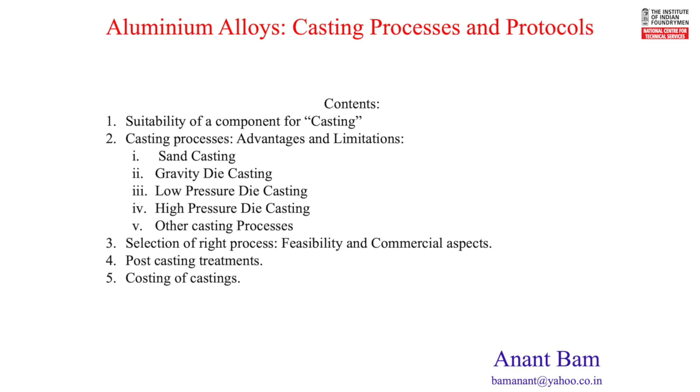During solidification, the grains of every casting are formed. All physical and mechanical properties are directly proportional to the fineness of grains. Too early solidification leads to chilling, and delayed solidification leads to a mushy structure. Both these cases are not desirable. This means we should have more or less uniform solidification, or more or less uniform cross-section of the casting.

Thickness adequacy and fluidity: the liquid metal, as it advances in the mold cavity, starts losing heat to the mold walls and to the air within. This heat loss makes the viscosity of the metal rise progressively. The metal becomes sluggish and eventually stops moving. Since this is an inherent property, it forms a limitation on the casting wall thickness and span, or the length of the run, how long the metal can flow.

Surface tension: since the cavity of the mold is filled by a liquid, every fluid has its own surface tension, which naturally prevents it from adhering to the adjacent surface. So any fine details, lettering, or aesthetic features are subject to the surface tension of the metal. Hence, as surface tension increases, we cannot get a good piece.

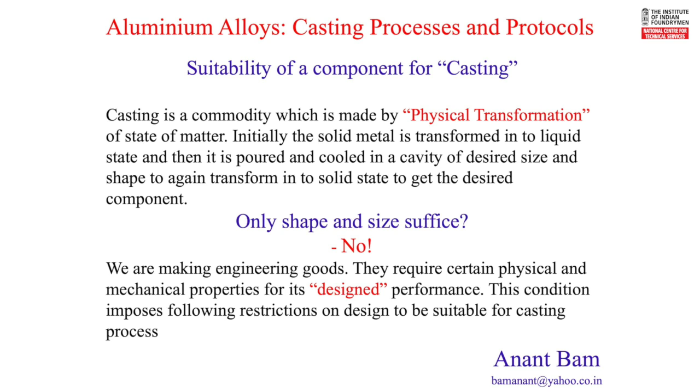Drafts and undercuts: as we have to draw the pattern out from the mold, or draw the casting out from the die, it naturally has to have a draft angle so it can be released. Therefore, we cannot have a right angle or an acute angle to the casting wall. Negative draft causes a dovetail effect and the casting gets stuck in the die. Hence, any such negative draft or acute angle leads to a loose piece. Every loose piece or undercut leads to a parting line, which affects the aesthetic of the component.

Contraction, cracking, and wall thickness: casting contracts during solidification, which creates stresses on its wall. The wall should be sufficiently thick to accommodate these stresses in the semi-solid or just-about-solid condition. Alternatively, we may use highly collapsible hollow cores for larger interiors, which may give poorer surface finish.

Many times there are ribs or walls that need to be joined to the main body of the casting. Too many junctions at a single point or line create metal inadequacy, leading to shrinkage at that portion. Every rib or web or wall acts as a radiator fin, and heat is lost from it through pin-fin theory, such heat loss leading to liquid requirement due to contraction at the center or junction. If the junction is too thin, it fails to feed the liquid, resulting in shrinkage at the root of such fin.

Instead of having multiple junctions at a single point, if one can defer the junction by adequate margin, then naturally such liquid inadequacy can be distributed at multiple places, and hence we can get rid of this shrinkage problem.

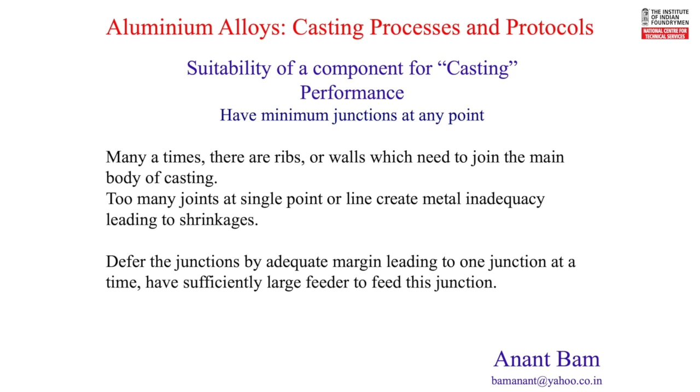Contraction strain: components like spoke flywheels are prone to such strains. These strains are developed during contraction and act on the junction of the hub to spoke and rim to spoke, leading to cracks at that junction.

It can be reduced by odd number of spokes. What happens during odd number of spokes? Two strain components are not added in a single line. They are deferred by a certain angle, and hence the spoke itself leads to a buckling or bend, which is less hazardous than such contraction strain.

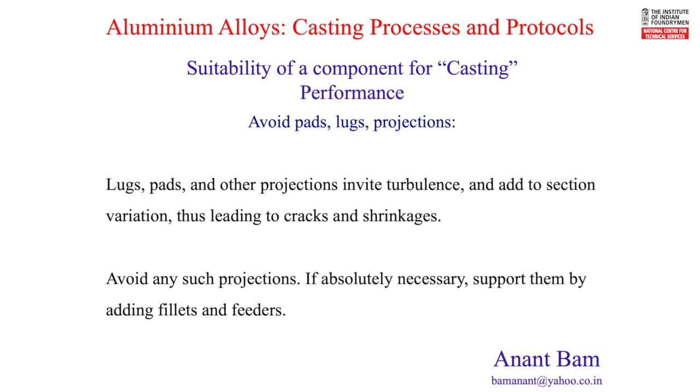Further, such a process can be encouraged by having curved spokes, and such an arc allows more strain to accumulate in it.

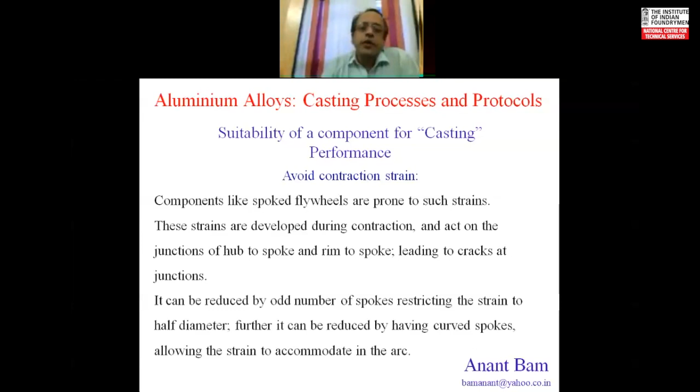Lugs, pads, or other projections invite turbulence during filling. Also, the section variation at such portions is very high, leading to cracks and shrinkages.

It's better to avoid any such section variation, if it is required by design, but then we have to go for selective cooling of such pads so as to achieve uniform solidification. It can be further assisted by providing proper fillets.

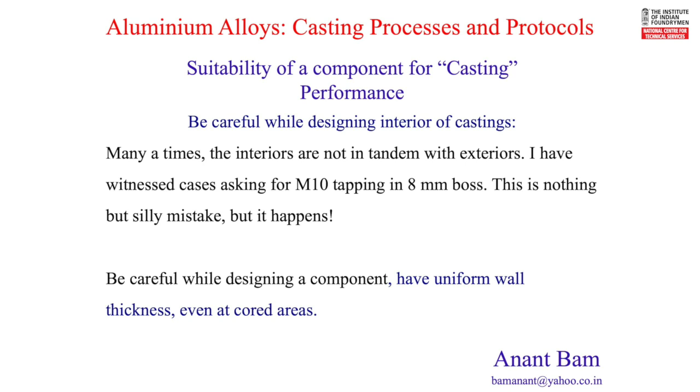Now, this is a silly slide, you may say, but I have witnessed many such designs and drawings wherein the designer has got certain thing in his mind, but the drawing reflects something else. In a tapping boss or clamping hole boss, if tapping is required for M10, the boss diameter itself is 8mm, and we cannot have such a large hole drilled in such a boss. It's a silly mistake, but it happens. So such design mistakes have to be avoided, and one has to ensure sufficient wall thickness even after machining.

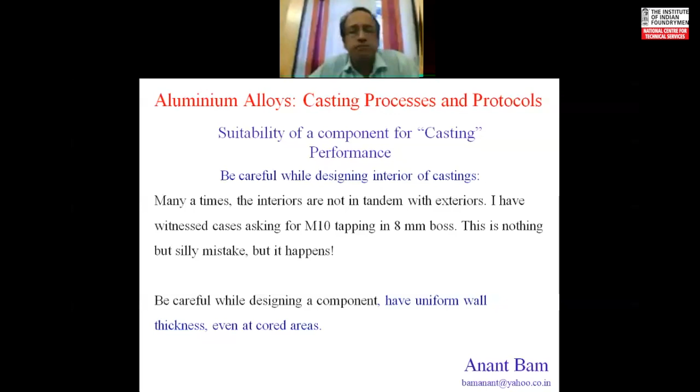Too small cores can be avoided. As a thumb rule, anything smaller than half an inch can be avoided very easily in case of aluminum castings.

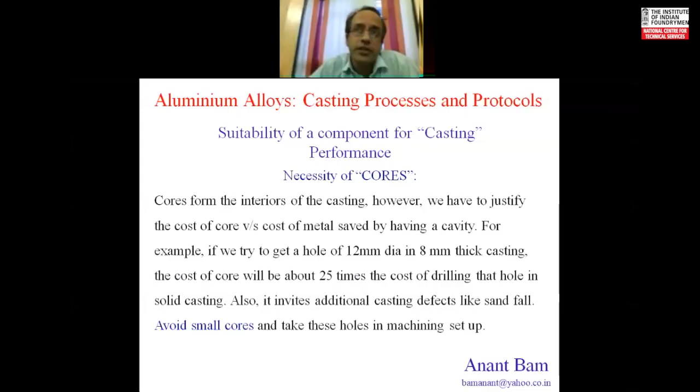When we talk of permanent mold or die casting, then we can go as small as 4mm or 5mm cores using metallic pins or metallic inserts. But anything smaller than that for aluminum has to be avoided.

Too much machining allowance has to be avoided because any swollen casting adds to the mass, and nowadays parties are asking for per piece basis. Lighter the casting, more is the benefit to the foundries.

Also, metallurgically, the skin of casting is the earliest solidified portion, and hence it has got the best metallurgical and mechanical properties, and we are removing that by machining. We should go for the smallest or minimum possible machining allowance.

Practically for HPDC castings, 0.5mm on tool point is good enough. 1mm for medium size castings, gravity die casted. And 3mm on tool point is sufficient for very large castings, more than a meter or so, through the sand casting route.

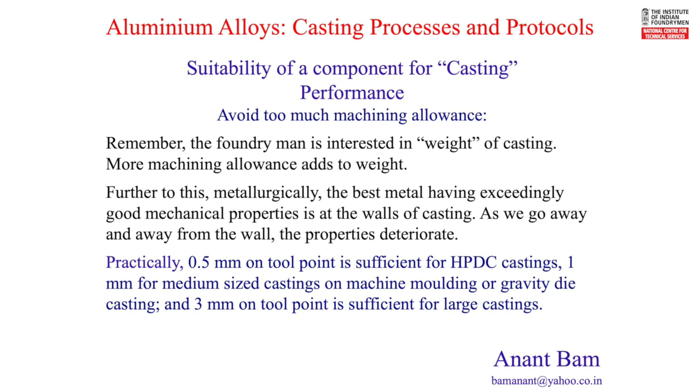Instead of having a simple right angle bend, we can have a multi-axial single bend, thereby reducing chances of any further hindered contraction. Such logic works very well for tubes and pipes.

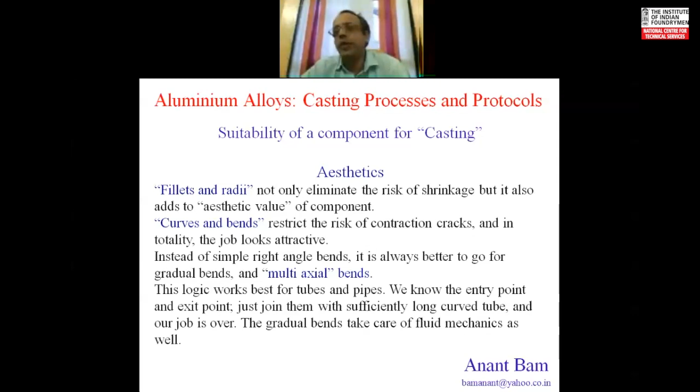Usually, aluminum components are used in engines or intake manifolds or air pipes or anything like that, and thereby you have to connect one end to the other end. Both ends are fixed geometrically. So the best way is to design something like a rubber hose fitted from one end to the other, and a natural catenary or free fall curve that rubber hose will attain, that one has to follow during the design of the aluminum component. That leads to least possible stresses during casting, easiest metal flow, and casting becomes good.

Aesthetics and surface finish criteria have to be noted earlier to process selection. High pressure molding or die casting leads to a better surface finish. But again, all those processes have got limitations of their own, and one has to understand the process and the quality requirements and mix and match both to deliver a good casting or a good sellable component.

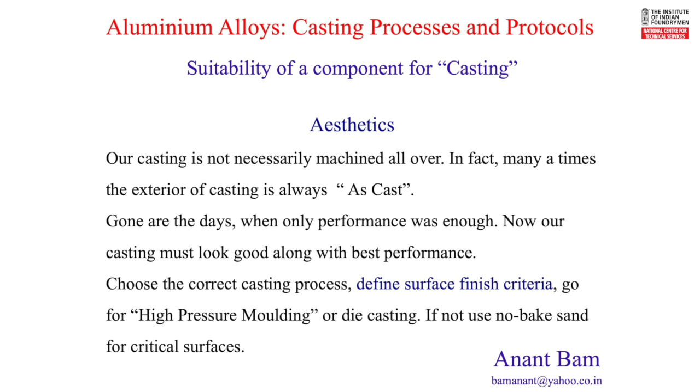Ease of operation for foundrymen as well as machining and assembly shop workers must be considered, because if you are talking of mass production, time study has to be considered. During time study, if you find that fitting some component on a jig, or opening some die, operating some loose piece, placement of core—all these things, which are non-value added items although essential in the process—they do not add to the value of the process. So all these things lead to increase of time, thereby increase of cost.

Have sufficient reference planes, provide clamping pads, use minimum machining, standardized fitments and sizes to limit the tooling, make maximum operations in single clamping, make simple assemblies. All these things are applicable to machining and assembly, but they have to be considered during the design stage itself.

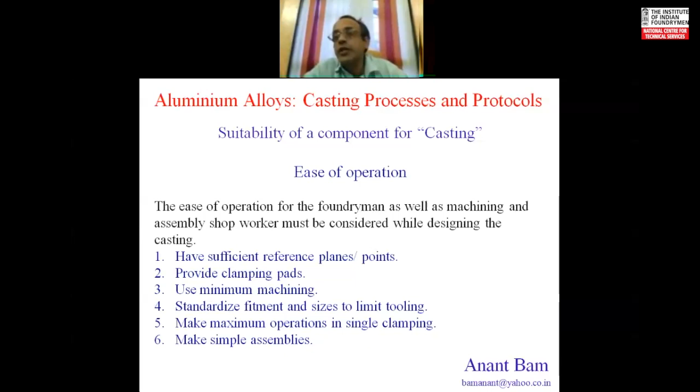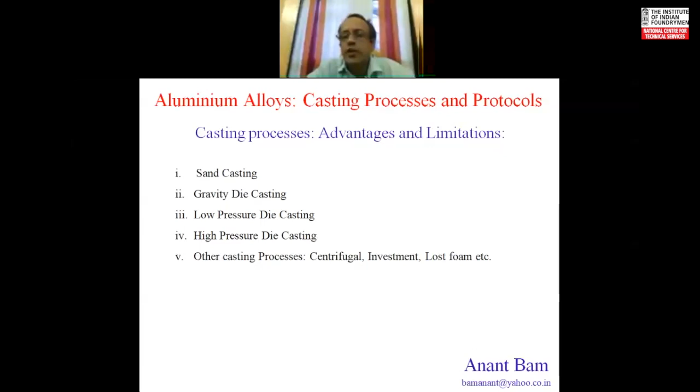Now let us understand the core subject, the various casting processes suitable for aluminum alloys. They can be listed as sand casting, gravity die casting, low pressure die casting, high pressure die casting, and a fifth, broader category of other casting processes, which may include centrifugal casting, investment or lost wax casting, lost foam, or any other casting process.

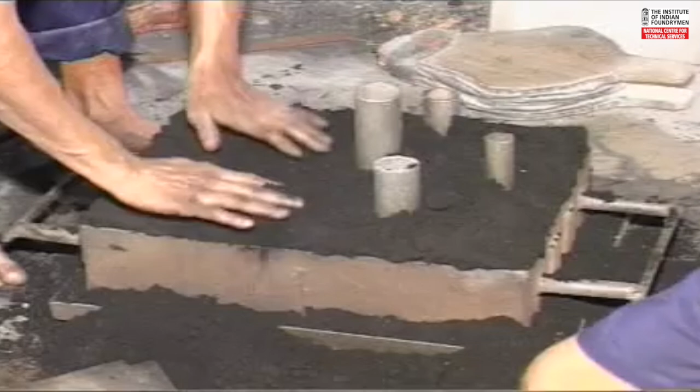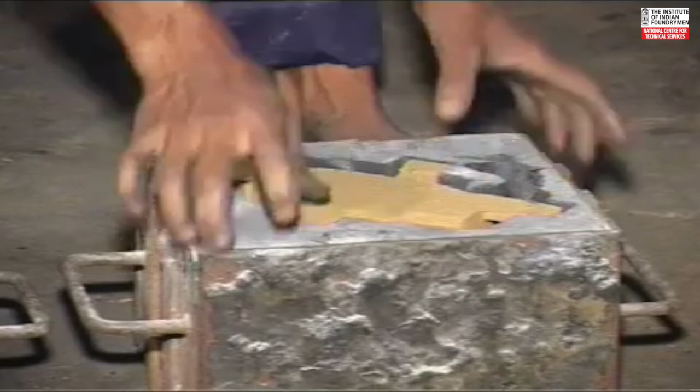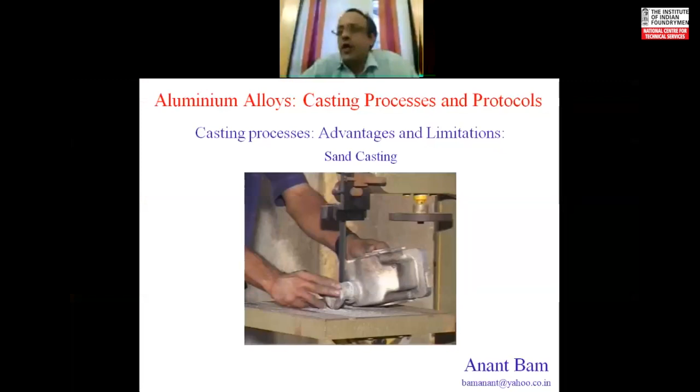Sand casting is a primitive form involving loose pattern hand molding. You may find this in Aligarh, Moradabad, and certain pockets making handicrafts, all jobbing foundries. Even in Chakan, Aurangabad, and Pune, these areas still follow this primitive practice. There are only one or two foundries in India which have machine molding for aluminum castings. This is because aluminum is very friendly to permanent mold casting, i.e. die casting. Hence, only prototypes or small batches remain with sand casting, and sand casting is not popularly used in any automated molding line.

In sand casting, the mold is made by a sand binder system using a pattern and a molding box. Such molds are temporary, and for every casting, one mold is necessary. Molds can be made by hand molding or by machine molding. However, for aluminum castings, machine molding is not popular in India. The process has many variables and is prone to more defects, and the surface finish is quite rough. However, this is the fastest route for any casting development for a small batch. Capital input costs are least, but variable cost is slightly high. Dimensional repeatability is poor, and hence larger machining allowances are necessary.

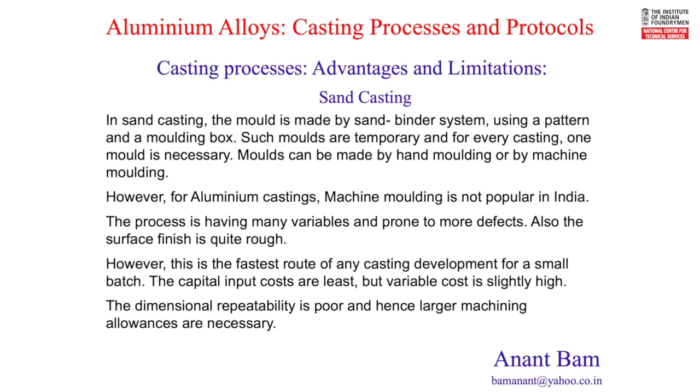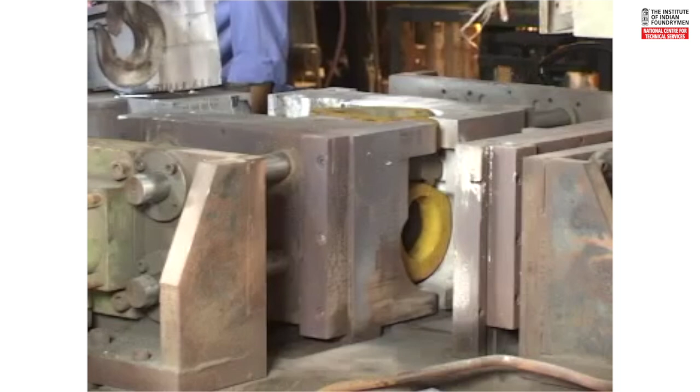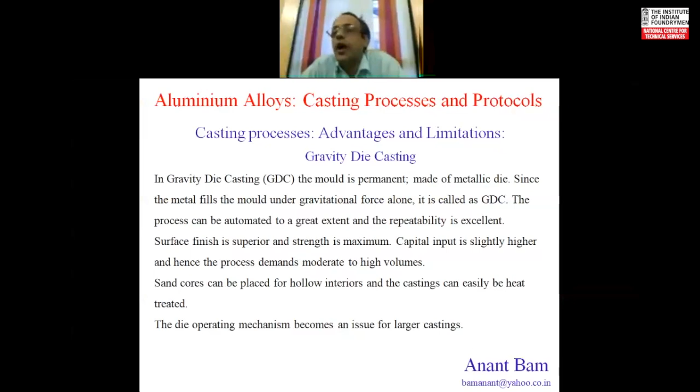In gravity die casting, the mold is permanent, made of metallic die. Since the metal fills the mold under gravitational force alone, it is called gravity die casting or GDC. The process can be automated to a great extent and repeatability is excellent. Surface finish is superior and strength is maximum. Capital input is slightly higher, and hence the process demands moderate or higher volumes. Sand cores can be placed for hollow interiors, and the casting can easily be heat treated. The die operating mechanism becomes an issue for larger castings, but nowadays, with the advent of larger hydraulic power packs and pumps, size of casting has not remained a limitation on the gravity die casting process.

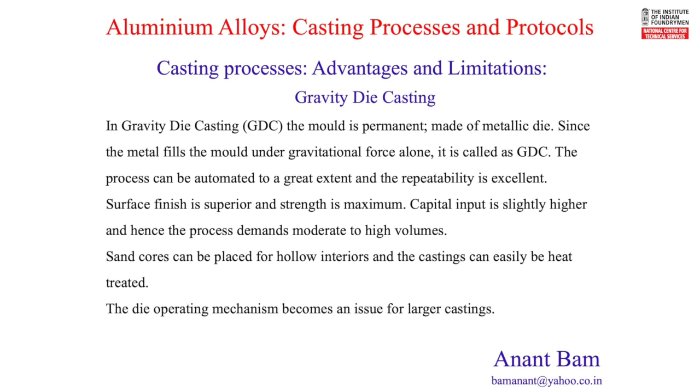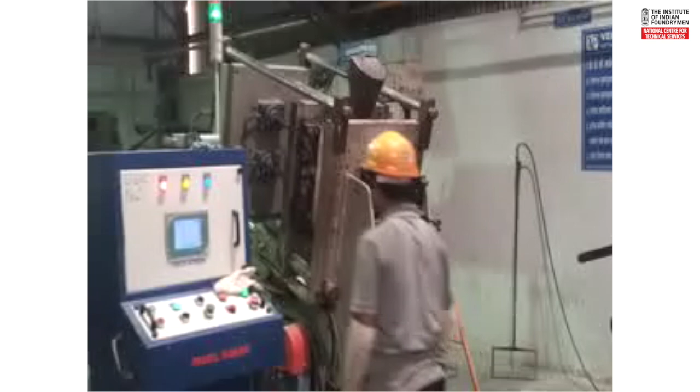A further advancement is the tilting gravity process, or Durville process. The metal is poured into a saucer attached to the die, and the whole assembly is tilted so that metal fills in laminar flow. This delivers better mechanical properties and minimizes issues related to filling. You can control the tilting speed and fill rate both, thereby adjusting directional solidification required for the component. In this process, the mold is tilted along with the pouring basin or saucer. This eliminates turbulence and allows directional solidification with maximum yield. The process can adopt direct top pouring, and castings made are superior in mechanical properties and overall quality.

The equipment is slightly expensive, but due to excellent results, this method is commonly used for critical castings like cylinder heads. Sand cores can be placed and heat treatment is very easily possible. I have seen many foundries producing cylinder heads for Indian as well as foreign cars, and the heads produced by this tilting gravity process are far superior to any other process. I have seen all three processes for cylinder head manufacturing - stationary gravity process, tilting gravity process, as well as low pressure gravity process - but the performance of tilting gravity cast cylinder heads is the best.

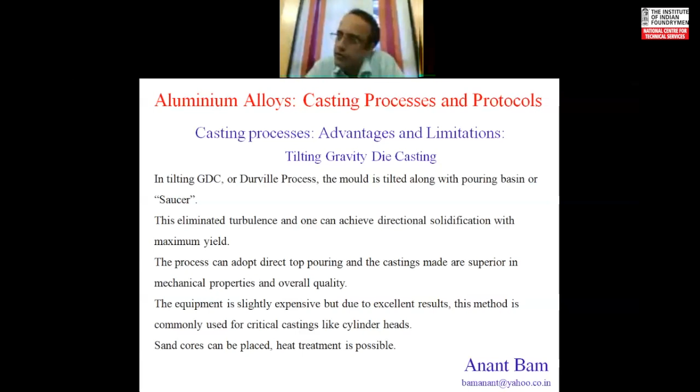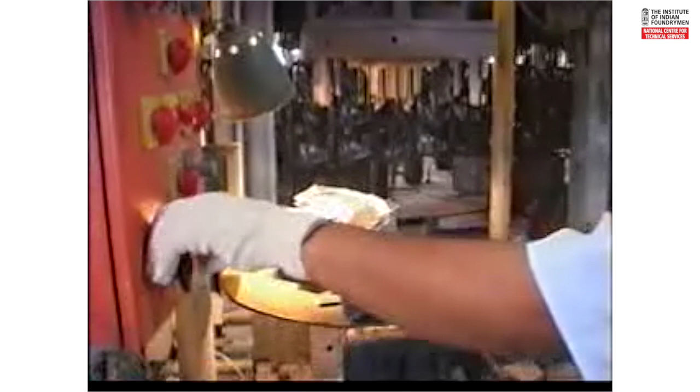Next is low pressure die casting, wherein the die along with the operating mechanism is mounted on top of the furnace itself. A stock tube, or leak-proof tube, connected to the die bottom is immersed in the crucible. The furnace, crucible, and bottom of the die are all in a pressure-tight chamber. Once the die is closed, the bottom chamber is pressurized by means of inert gas or air. That pressure creates direct pressure on the surface of molten metal within the crucible, creating a fountain of metal through the stock tube. That fountain enters the die from the bottom and spreads throughout the die. Since the die is also close-matched, it doesn't leak. Once fully filled, a back pressure is sensed, and a holding pressure is applied. The estimated solidification time is calculated, and for that much time the holding pressure is applied.

In LPDC, the die is similar to that of GDC, but it is closely matching and airtight. Such die is mounted on top of the furnace and the pouring point is at the bottom of the mounting plate, which is connected to a metal pool by means of a ceramic or metallic tube, called the stock tube or riser tube.

Compressed air or inert gas is then pushed into the furnace. One point I forgot to mention: the furnace and the bottom of the die, or bottom of the mounting plate, all put together make an airtight or pressure tight chamber. We are putting compressed air or inert gas into that airtight chamber.

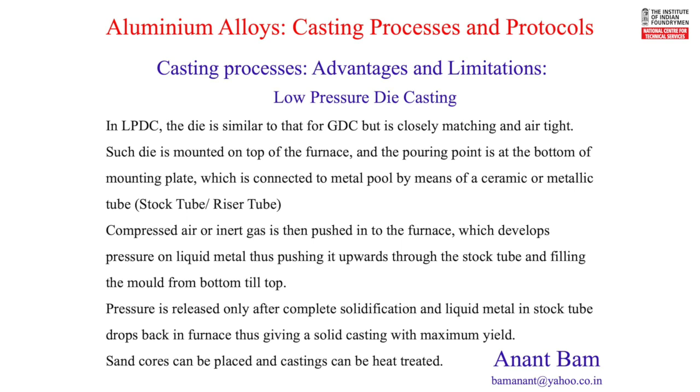There is one drawback: we have to consider 1 or 2 pouring points maximum, since the crucible mouth is the limitation on how many pouring points or stock tubes one can place. You can have a maximum of 2 pouring points, that is 2 stock tubes. Any other section variation which is away from these pouring points has to be catered to by side feeders or by accelerated chilling through heat pipes or other such methods.

So if you have a component like a box having too many mounting pads on its rim, then you will encounter shrinkage at all those mounting pads.

This process is very popular for alloy wheels or automotive aluminum wheels, because the wheel rim does not have any isolated heavy section. The heaviest section of the wheel rim is the hub of the wheel, which can directly be connected to the stock tube, wherein the filling point is created.

Since the rim thickness is more or less uniform, it does not require any ring riser, and solidification is easily achieved, productivity is increased, and yield is increased. You can get as much as 90 to 95% yield for any alloy wheel.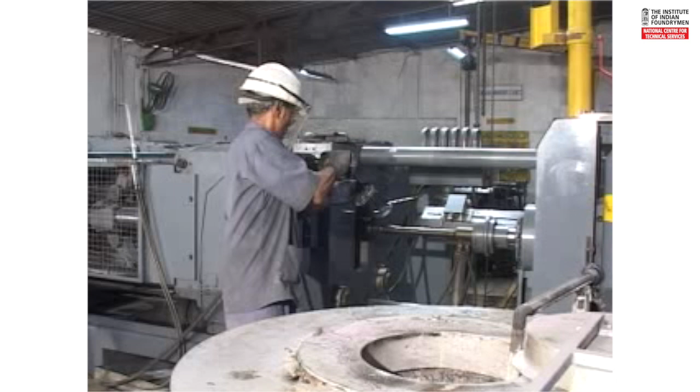Metal is poured into the cylinder, a piston pushes it, the metal is filled into the die, and after solidification it is ejected. In case of pressure die casting, metal is injected into a pressure tight die by pneumatic force very rapidly. Since the pressure is very high, an equally strong clamping force is needed.

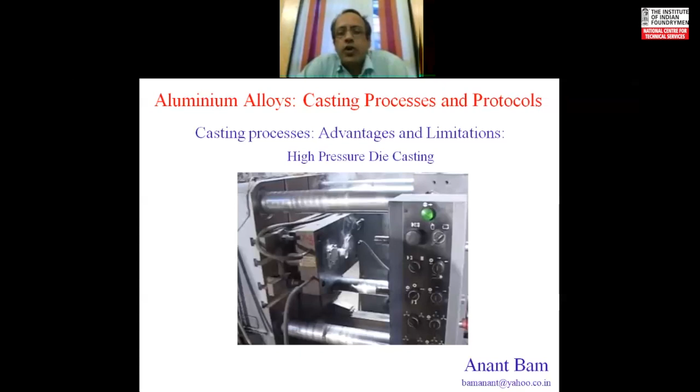Rather, it is not equally strong - it has to be 1.25 times larger than the injection force. It is needed to keep the die closed, otherwise a flash will appear. Very thin walled castings can easily be made by this route.

Since the capital input cost is very high, this route is suitable for high volumes only. The dimensional stability is excellent and machining allowance can be kept at minimum, say 0.2 to 0.5 mm on tool point. Due to extreme turbulence in mold filling, the castings often have inclusions and tiny porosity, which is compressed minutely.

Such things open up during heat treatment, creating blisters and cracks. Hence, these castings are not heat treatable.

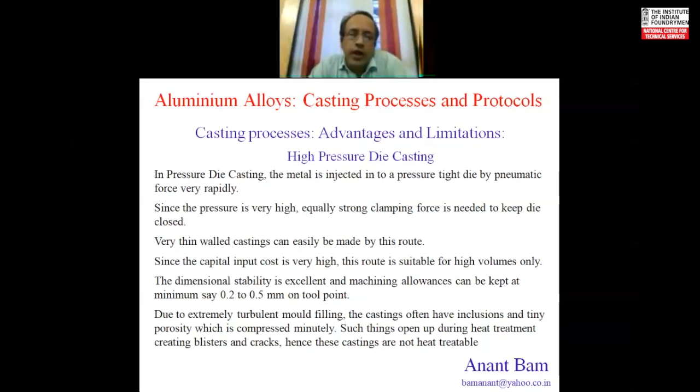The latest advancement in pressure die casting is vacuum assisted pressure die casting or vacuum PDC, wherein the die chamber is evacuated by large vacuum pumps and further pressure die casting stroke is applied, thereby limiting or controlling the turbulence, and hence the chances of any inclusions or other entities or cavities being formed and compressed are minimized. Hence, vacuum assisted pressure die cast components can be heat treated.

Since metal is strongly pressed against the steel mold at high temperature, there is electron transfer and soldering of aluminum happens with the die. To prevent soldering, HPDC alloys need higher Fe content. Such Fe kills the greed or hunger for Fe, and hence these castings are vulnerable to cracks and microporosities, because higher Fe content leads to

microstructural defects. The process can be made highly automated, and hence it is used for many automobile components. The grains are extremely fine, and as such the as-cast strength is quite high. By such alloy compositions and process leading to higher strengths, the need for heat treatment is also minimized.

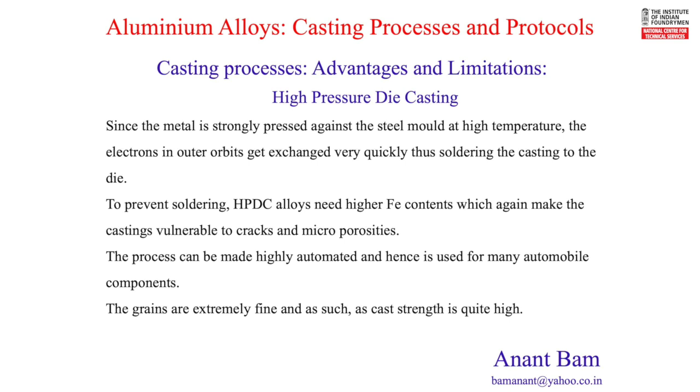In other limitations, sand cores cannot be placed in high pressure die castings. You have to go for metallic pins or inserts, and in some remote cases, salt cores can be placed, which is a costlier process. Centrifugal die casting process: in this process, metallic molds are rotating.

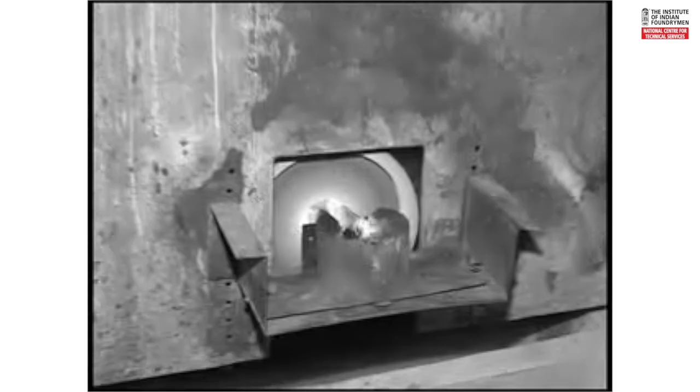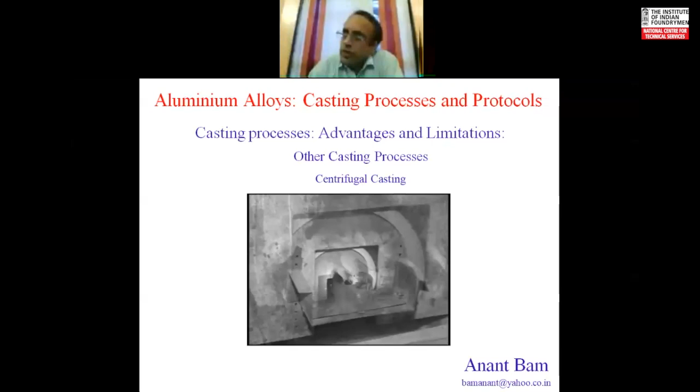In case of centrifugal casting, everybody knows that cylindrical shape components can be easily cast, and it is applicable for any liners or rings. I have seen only two foundries producing aluminum castings by centrifugal means, and that's a very typical application.

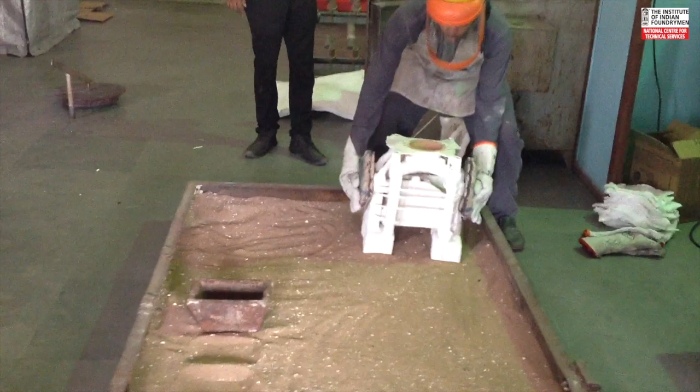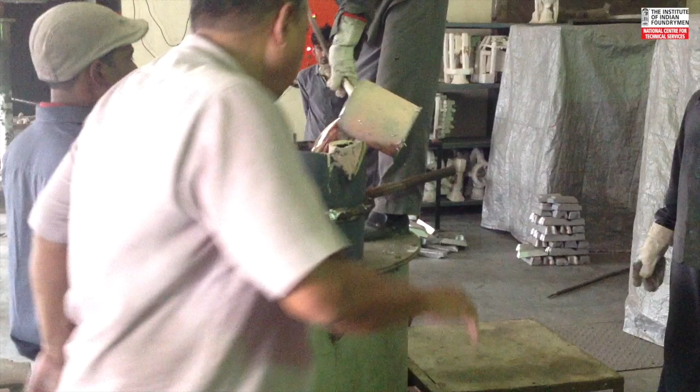Investment casting. In case of investment casting, a wax model or wax tree is prepared initially. It is further coated with multiple layers of refractory coatings. After proper drying of these coatings, this assembly is first heated to drain off excess wax, and then it is heated in a furnace so as to get a ceramic shell. In such a hot shell, metal is poured, thereby delivering very fine surface finish and intricate shapes.

One or two slides for the latest process, that is lost foam casting. In case of lost foam casting, expanded polystyrene foam, or what we call high density thermocol, is used. The replica of the casting is made in that thermocol by expanding polystyrene in a die. It is similar to investment casting or lost wax casting. In case of investment casting, we prepare a wax replica. In case of lost foam, we prepare a styrene foam replica.

A bunch or tree is made by assembling these replicas by suitable runner, riser, feeding and gating system. This assembly is made by adhesion. We stick these runner, riser, gatings to the replica externally. Then such a bunch is coated, just similar to investment casting. The difference is that for investment casting, you require a minimum of 4 or 5 coats. For lost foam casting, even a single coat is sufficient, but usually people go for double coating.

The replica, after proper drying, is placed in an empty mold box. The whole system is vibrated, thereby allowing compaction of the dry silica sand. Only the pouring basin and the exit risers are visible at the surface.

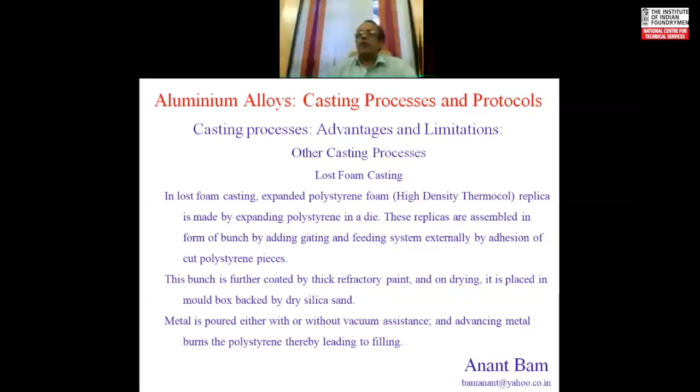Then, in case of lost foam, the metal is directly poured. In case of vacuum assisted foam casting, the metal is poured with vacuum being applied to the mold. Advancing metal burns the polystyrene, thereby leading to complete filling of the mold. The volumetric product of this combustion is very low. If you consider in percentages, the outcome of the combustion is hardly 0.2% by volume of the polystyrene itself, and this often goes along with the metal flow and comes out through the exit riser. In case of vacuum assisted casting, it comes out very easily.

You can see an animated video of lost foam casting. This is by courtesy of J. K. Engitech Ahmedabad.

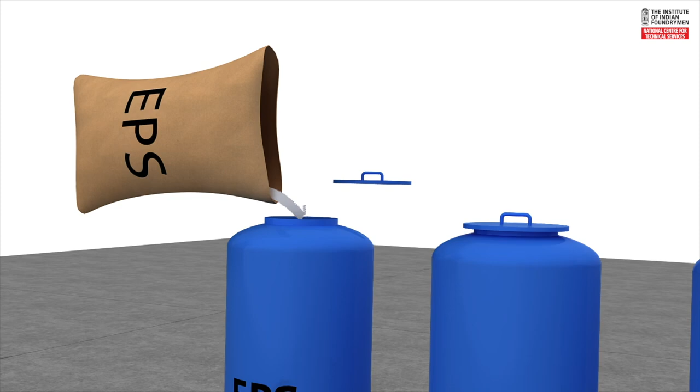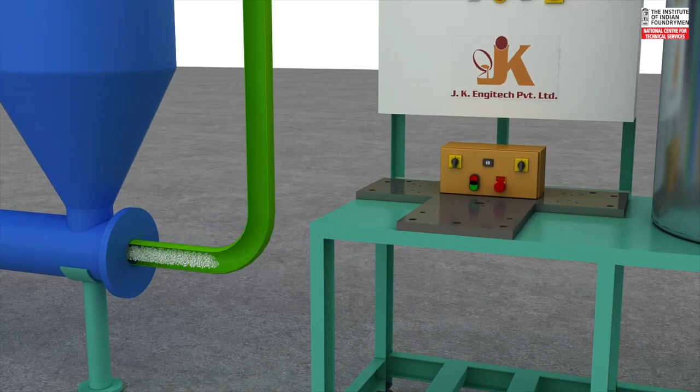These blue hoppers contain the polystyrene and its activators, catalyst, etc. It then goes into the doser. Expandable polystyrene beads are created, which are further transferred to the molding machine. In this molding machine, our polystyrene replica is created.

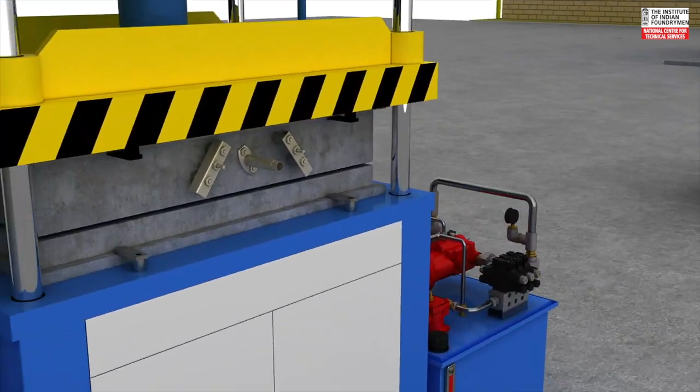Once this is done, it is called the white part, and then the refractory coating is applied. But I found one lacuna or one incorrect thing in this video: the refractory coating is shown applied to the individual component, but it has to be applied after tree assembly. That is, the total assembly has to be coated. Here they have shown the coated component placed onto the coated tree, but actually the coating happens to the full assembly.

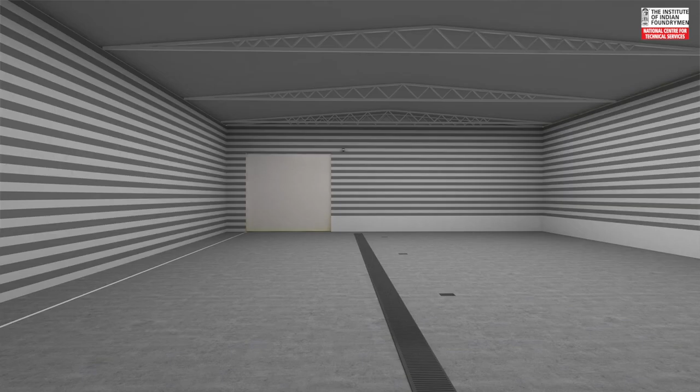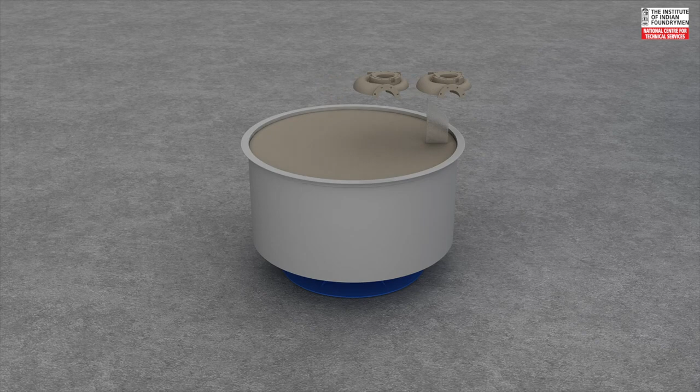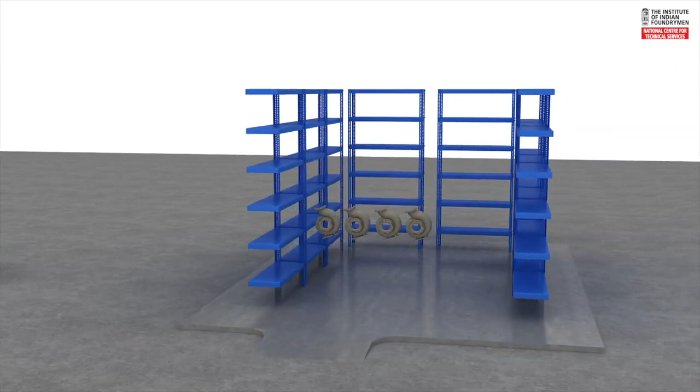This is the mold box. The tree is placed, sand is poured, and it is further vibrated. This sand is totally dry sand, there is no binder in it. Metal is poured, it burns the polystyrene, it is as easy as that. Since there is no binder, the knockout and other problems are eliminated. The surface finish is delivered by the die and simultaneously by the first coat of the coating, so sand properties or sand fineness does not affect the surface finish at all.

Now that we have understood the processes, the parameters to consider are: first wall thickness, then surface finish, then possibility of core work, possibility of heat treatment, and mechanical properties expected.

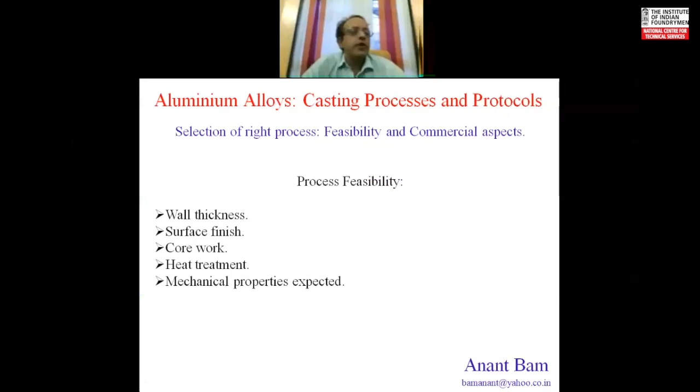For sand casting, as a thumb rule, for aluminum alloys a minimum 6 mm wall thickness is expected. This is a thumb rule; it does not mean thinner castings cannot be cast, but the economics of the situation changes. For maximum wall thickness, there is no limit. Section variation can be easily adjusted, 3.5 mm minimum, maximum there is no limit, but the degree of difficulty increases slightly.

So is the case with low pressure die casting: 3 to 3.5 mm minimum, maximum 25 mm, section variation adjustment is still difficult, because if you have section variation at the remote or far end, it cannot be fed since your pouring point is at the center of the casting. For high pressure die casting, minimum wall thickness becomes 1.5 mm, maximum 15 mm, with section variation adjustment further difficult. All these are ballpark figures.

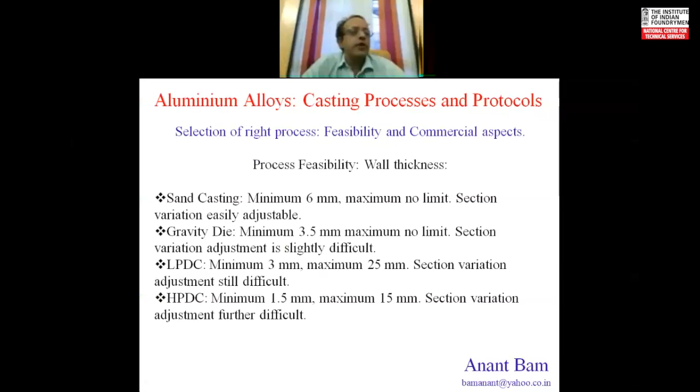These are not hard and fast rules, but as industry practice they are considered fairly rigid figures. Regarding surface finish, for sand casting it is the worst surface finish available in the whole system, with the best possible being about 10 microns.

For gravity die casting, the best possible finish is 3.5 micron Ra. For LPDC, it's the same, because the die manufacturing process, the die surface and the coating surface together deliver the surface finish. For high pressure die casting, since the coating is in liquid form, a mirror polished die can deliver a mirror polished casting.

So the surface finish is excellent in high pressure die casting, about 1.5 micron Ra. Now for these three casting processes, gravity, low pressure die casting and high pressure die casting, why is there a difference in surface finish? For high pressure it is 1.5, and for gravity and LPDC it is 3.5, because initially the die manufacturing process and what is immediately in contact with the metal is the coating.

For LPDC and GDC, the coating is a solid film. The liquid coating is sprayed on the die and allowed to solidify, or the liquid content evaporates, leaving solid particulate matter on the die surface. The grain size of this solid matter, usually talc, zirconia, alumina or any such refractory material, and its concentration at that location, delivers the surface finish to the casting.

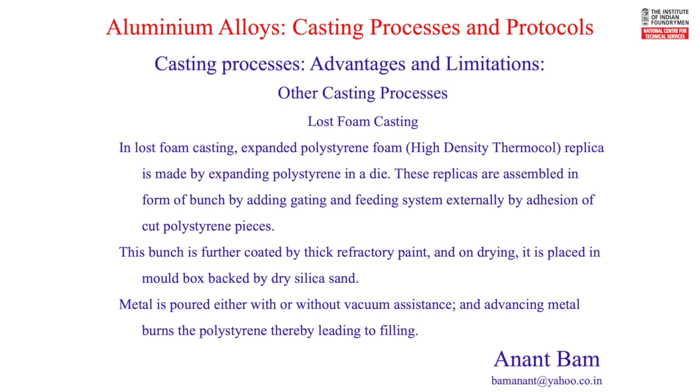If you have uniform spraying of die coat, you get uniform surface finish all over, as good as 3.5 micron Ra. Due to its liquid condition initially, this coating drips gravitationally downwards, accumulating at any crevices or horizontal places it finds nearest. Such accumulation or lump formation leads to excess deposition of coating, disturbing the finish. So any coating process has to be followed very carefully.

There is a misconception amongst gravity die casters especially that this powder coat needs a rough die surface for proper anchoring. But as I said, it's a misconception, because the anchoring itself does not happen - it is the sticking of the coating to the surface, through the binder embedded in the coating assembly. The coating is an active ingredient, a binder, and a carrier - a three-part system.

The carrier can be water or a thinner. The binder can be sodium silicate or boron nitride or any such sticky material. And the active ingredient can be talc, zirconia, silica, alumina, any such material. There are advanced coatings like nanotechnology coatings, wherein the particle size is ground to nanometer. Such coatings are expensive, but they deliver further better surface finish.

All these coatings wear off because every time metal is rubbed on it during fill, and the solidified castings during ejection again rub on the coating. So the coating has to be repeated every now and then. Commercial coatings like number 140, number 21, number 39, etc., need to be touched up after every 3, 4, at most 5 shots, thereby losing the tandem or rhythm of the cycle.

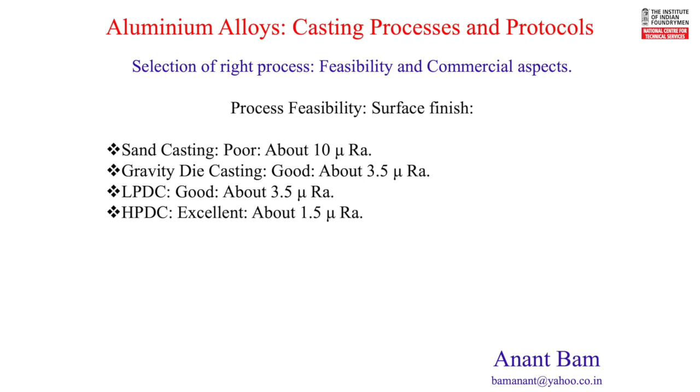This film keeps dripping towards the bottom of the die, and usually the ingate is placed at the bottom of the die. So this leftover mineral oil enters the gate part of the system, and the metal stream coming into the die first bombards against this accumulated lubricant before reaching the cavity, creating inclusions of lubricant. However, the surface finish delivered is excellent because it's an oily film - there's no solid particle or grain between the die surface and the metal surface.

Core work - every casting or component needs some interior portion, interior geometry, for which we place a core. For sand casting, any and as many core work is possible, very easily possible.

Similarly, you can place many cores at many locations, but since the mold is metallic, it is not permeable. Hence core gas may become an issue, and we have to take care of venting very specifically. So is the case with low pressure die casting, cores can be placed at multiple locations, but again due to metallic core gas becomes an issue. You have to assess it carefully.

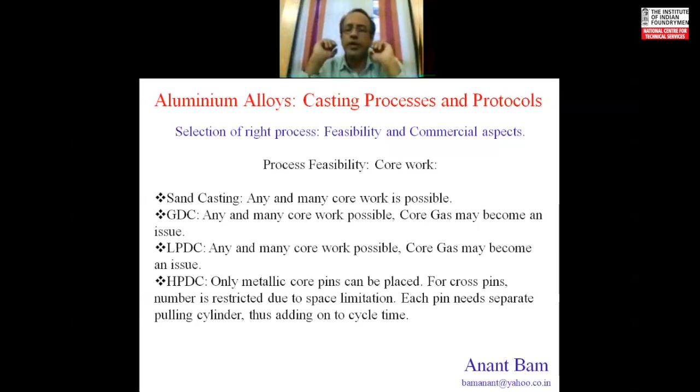For high pressure die casting, only metallic core pins can be placed. And if you have to place cross pins, that is to the axis of the component, if you want a cross bore, you need a separate extraction mechanism for each and every cross pin. So the number of cross pins is limited because the total cycle time gets restricted by operating all these cams or any additional cylinders.

Sand casting, all types of heat treatments can be done. Gravity die casting, low pressure die casting, all heat treatments can be done. But for HPDC, castings develop blisters and cracks due to release of compressed contamination. Hence heat treatment, except stress relieving, is not possible for normal pressure die casted components.

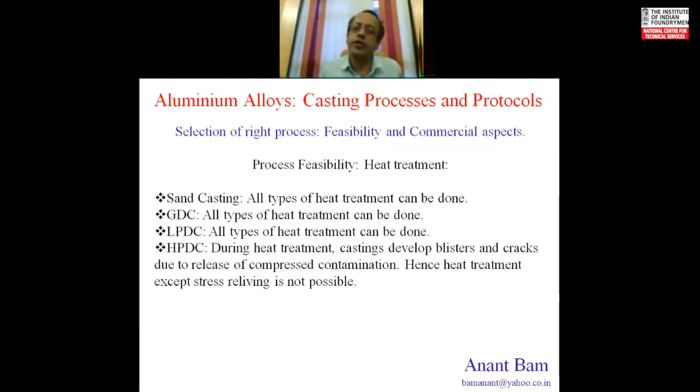Mechanical properties expected: for sand casting, since the grain size is slightly coarser, you get moderate tensile properties and moderate hardness, which can further be enhanced by heat treatment. For gravity and low pressure die casting, due to the metallic molds, the chilling effect is very good. Hence grain size is controlled towards more fine grains.

Hence tensile properties and hardness in as-cast conditions are higher than sand castings, which are further enhanceable by heat treatment. In case of high pressure die casting, the alloy system itself is different, leading to higher hardness. The process is such that the grain size is super fine, and hence higher tensile and hardness are achievable in as-cast condition itself. The grain size or grain structure is very, very fine in case of high pressure die castings.

Now we go to the critical part of it, the decision making portion, that is commercial viability. Equipment cost for sand casting is very less, because as we have seen, most popularly for aluminum alloys, we go for loose pattern hand molding, and thereby we don't require any molding machine as such. In case of critical components through the sand casting route, you go for no-bake molding, which requires only an intensive mixer or maybe at the most a continuous mixer. That's all you require for equipment.

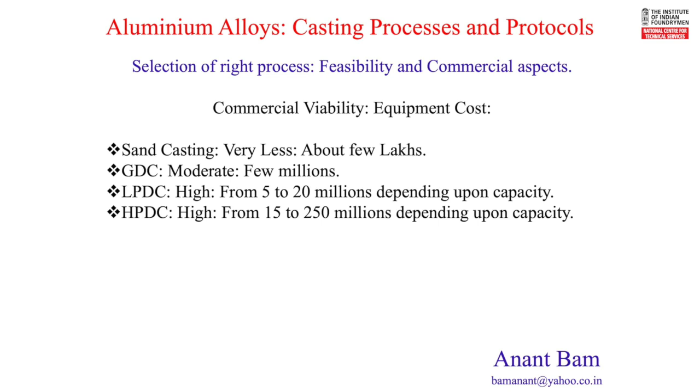For gravity die casting, the equipment cost is slightly high because you need a die operating mechanism. For low pressure die casting, the equipment cost is further high because you need, apart from the die operating mechanism, a pressurized, pressure-tight chamber large enough to accommodate the whole furnace. For high pressure die casting, it is further high because the equipment is quite sophisticated and on a higher end.

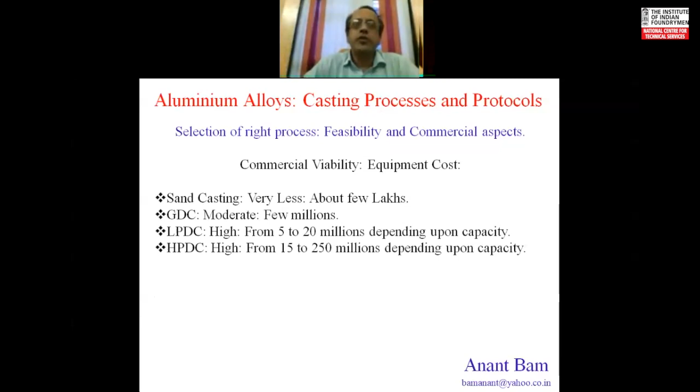Operating cost: for sand castings, the operating costs are moderate due to excessive labor input and sand consumption. In case of green sand molding, the binder is a consumable and replacement cost of the sand after certain iterations is necessary. In case of no-bake sand, it is further high, and the reclamation cost is also added to it.

For gravity die casting, the operating cost is moderate because sand consumption is minimum, except for core. And the labor cost is also reduced due to mechanized operation of the mold. For LPDC, it is slightly higher because the cycle time, although comparable to gravity die casting, is always slightly higher since the bottom of the die is placed on the hot furnace, delaying solidification. Also, to operate this sophisticated machine, you need skilled operators, hence the labor cost is expensive.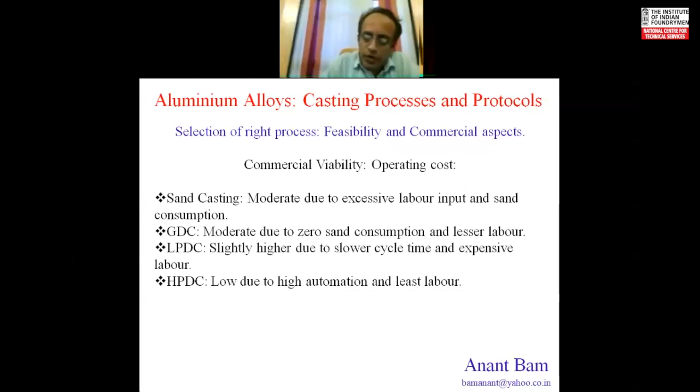For high pressure die casting, the operating cost becomes minimum because the machines are so sophisticated, it runs on auto mode and the cycles are so compact that you deliver a component in seconds. For a 4 kg component like a cylinder block of a two-wheeler motorcycle, the cycle time was as low as 72 seconds, and that's the beauty of high pressure die casting. You don't require any labor here - the metal is poured by auto pour, the die is dressed by auto spraying, and the component is extracted and goes directly to trimming.

Commercial viability in case of development time: sand casting is the fastest route, because the tooling is less accurate and can easily be made with the advent of 3D printing. You can make smaller patterns or larger patterns by way of multiple pieces of a pattern later on being assembled. So the fastest route is sand casting.

Next is gravity die casting, which has moderately high development time due to critical tooling and fixed methoding. You have to work more on methoding. Then after methoding is finalized, you have to carve a tool in a metallic mold. LPDC is further high because the quality of tooling and the quality of machining have to be further high.

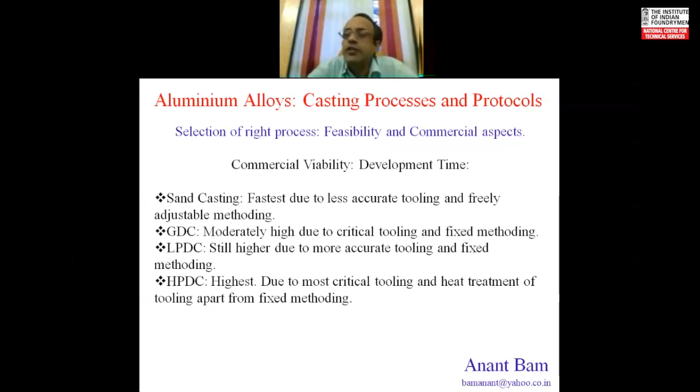It has to be pressure tight tooling with fixed methoding. For HPDC tooling, development time is highest because the tooling is very critical. You are injecting liquid metal in the die at very high force and pressure, and the die has to be perfectly blue matched. Otherwise, even a hairline gap may lead to molten metal coming out of the die in a jet force, leading to fatal accidents. Hence tooling becomes very critical, and to sustain this force, temperature, thermal shocks and pressure shocks, the die has to be nitrided and heat treated, adding to development time.

Minimum batch quantity - you have to strike a balance between feasibility and viability. For sand casting, you can go for as low as one piece, like for ornamental casting such as monuments or statues. These are popularly made by sand casting with an order quantity of just one piece.

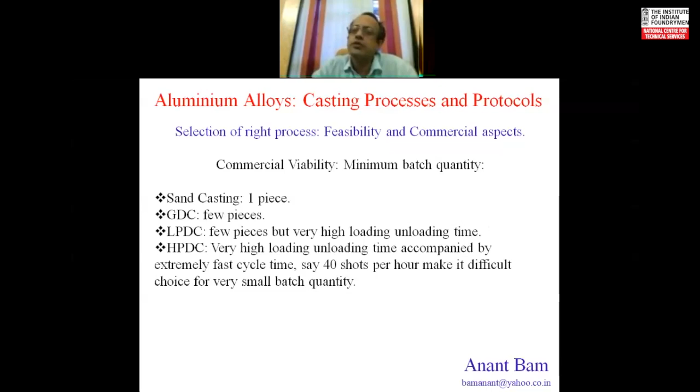In case of high pressure die casting, the minimum batch quantity requirement becomes very high because the cycle time is extremely fast, and loading-unloading time is also extremely high. Similar to LPDC, for HPDC you lose nearly a shift for loading plus unloading the die. The changeover time is 4 to 6 hours, sometimes extending to 8 hours. With a productivity of 40 shots per hour, it becomes a requirement that you need thousands of pieces to be produced once the die is loaded.

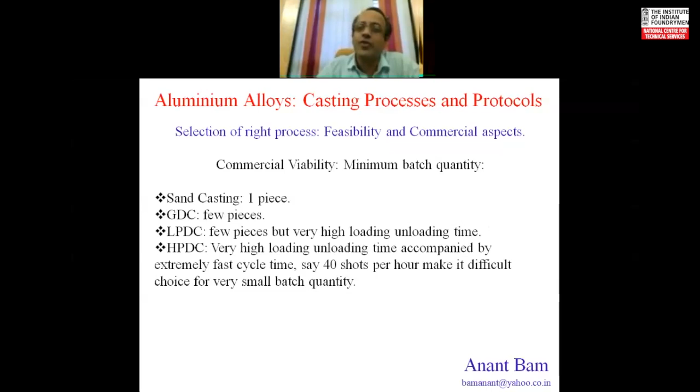That doesn't mean you are compelled or restricted to that quantity. If the party is ready to pay for your downtime, then you can quote for it. If the process is such that the component is feasible only through high pressure die casting, you should be able to load your full shift for that single piece you produce at the end of it. If the party agrees, that's the way out.

Now let us summarize all these processes in a single slide. This is the outcome of all the earlier presentations, and I request everybody to read it carefully and, if possible, take a screenshot of it - it will be very handy for all of you. There are parameters like strength, productivity, finish, core work, quality, leak proofness, minimum wall thickness, consistency, labor input, microstructural properties, capital cost, and process variables. I need not repeat each and every word, it is self-explanatory.

There is one common question everybody asked me in my earlier presentations - that is why I said quality of casting is poor in case of high pressure die casting. Because vacuum HPDC is a recent advancement and it is available with only one or two parties in India. Otherwise, every HPDC casting is a leaking casting. It is very popular for structural elements, but for critical components you have to go for further compromises.

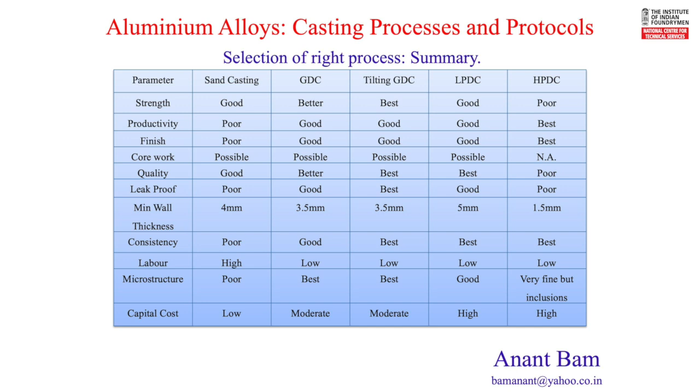In case of leak-proof castings, for high pressure die casting, impregnation becomes a process requirement. Usually we consider impregnation a salvaging process, but for high pressure die casting it becomes part and parcel of the process itself, because all HPDC components are inherently leaking components. That is why I put the word 'poor' in front of quality.

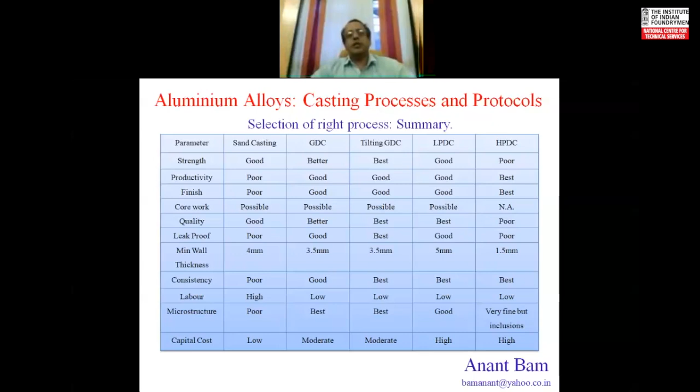In this last slide, we can briskly touch upon all the post-casting treatments possible. First is mechanical, which is a finishing process - this includes linishing, shot blasting, sand or bead blasting, and vibratory finishing. Electrochemical, which is anodizing or electroplating, and chemical, which is liquid painting or powder coating. All these are surface treatment processes available.

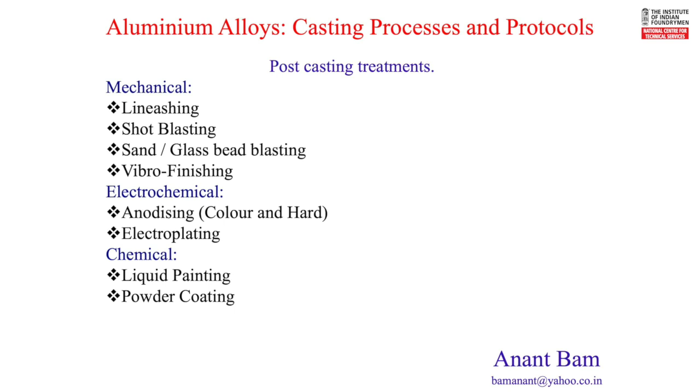We have discussed heat treatment and heat treatability in earlier slides, and hence these post-casting treatments are preparing the component for assembly, converting a casting into a subcomponent of the assembly. So that's the end of my presentation.